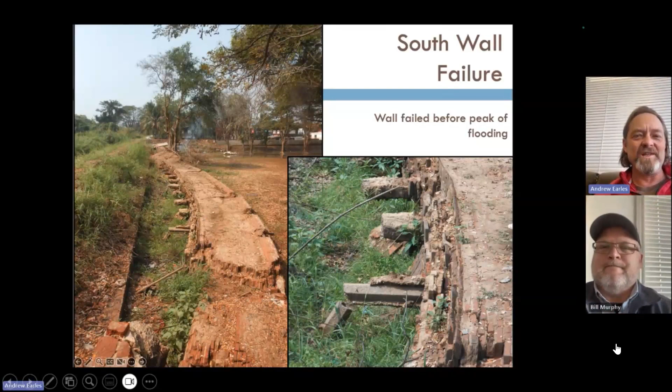So we helped them to redesign an improved flood wall in this location that will stand up to a flood like that in the future. And in order to do that, we had to do some geotechnical investigations, because you're going to build a big foundation. You need to be sure that it's not going to sink into the ground and that it'll be properly supported.

So we actually went out and did a full-scale geotechnical investigation in Thailand in 2013, and we did a number of test holes. Again, in the US, we pull up a drill rig and just punch these things into the ground. It's a much more involved process in Thailand.

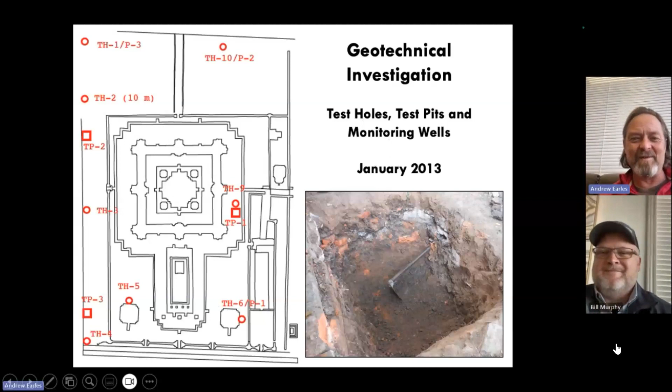We also dug some test pits. On archaeological sites, you have to be very careful and get proper permission to do any sort of digging at all. And when you do, you usually find some really interesting remnants of pottery and things like that from hundreds, if not thousands, of years ago in this case.

So this was kind of the rig that we used for doing our geotechnical testing. You can see they had this little motor where they'd pull up the weight on a rope. They'd have their Shelby tube going into the ground, lower it and smack it on the rope, and it would push in a couple inches at a time. Sometimes two of these guys, you see the two ropes hanging down on either side, would jump up and grab those and pull down on them to push it in a little further. But it takes a long time to bore 3 or 4 meters doing it this way.

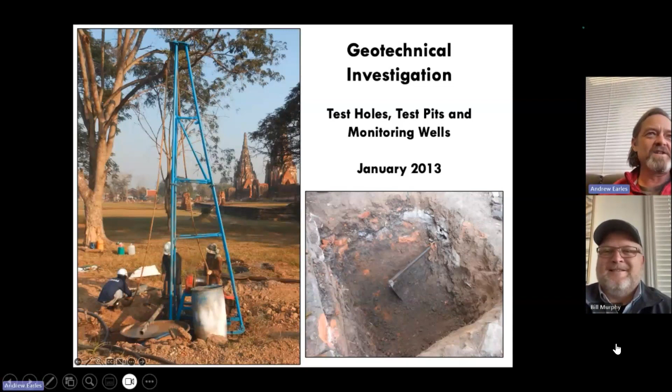But they did, and it was good data, and we were able to design a good foundation for this wall. And we built that flood wall, which has now been built and is protecting the site.

So another site I've worked on in Southeast Asia is called Phnom Bakheng, and that is in the Angkor area of Cambodia, which is honestly one of my very favorite places I've visited in the whole world. The Angkor Archaeological Complex covers hundreds of square miles, and there are just amazing temples all over the place.

A lot of them are really concentrated in the area around this temple called Phnom Bakheng. Angkor Wat, which I think everybody has heard of, the largest continually active Buddhist monastery or Buddhist temple in the world, is a kilometer down the road from this. And then another site called Angkor Thom, which is one you might have seen with a bunch of carved faces in the stones, is a kilometer up the road from this.

So this is one of the earliest structures at Angkor. Actually, it's interesting because most of the structures in Angkor are built pretty low in the floodplain, but this one was actually built on a hill. That's what Phnom means - Phnom means hill. So this is a temple on top of a hill.

And you can see this is kind of the general layout. Here's our Phnom Bakheng, where you can see the hill. This is Angkor Wat, which is very famous, and this is Angkor Thom to the north, which is also very famous.

Now, I love this huge feature you see over here - this was an ancient reservoir called the Western Baray. And this feature you can see over here, although it's not shaded in, was the Eastern Baray. We believe, and it's pretty well accepted, that both of these were major reservoirs that helped to support this civilization while it was active here, 1,000 to 2,000 years ago.

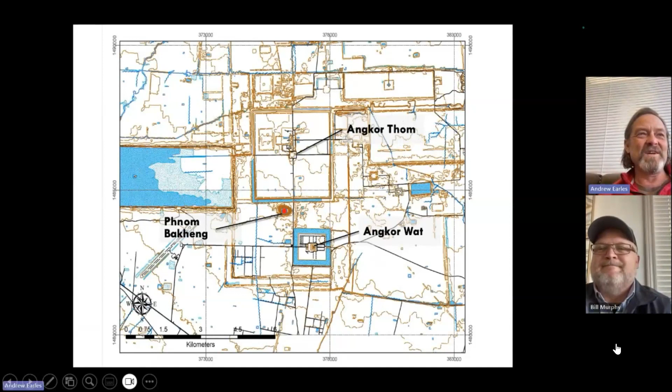Yeah, classic. So anyway, this is Phnom Bakheng, and I got in there - I think it was in the middle of the rainy season. The first afternoon I got there, the way it works is it doesn't just rain all day. It's usually sunny for most of the day, then storms roll in the afternoon and it rains really hard for a few hours, then it goes, and it repeats the next day. Well, the first day I got there, I was just meeting people, and sure enough, in the afternoon it started raining, and everybody headed into the shelter except for me.

I put on my raincoat and ran out, taking pictures and videos and making notes on my map, because I needed to figure out how the drainage works around this temple. It's up on a hill, but it's a pretty flat platform up there, and there are a lot of areas to consider. The best way to figure that out was to actually see where the water goes. So I mapped out these drainage paths and sump areas where water ponds. Within 24 hours of arriving, I had a perfect drainage map because I'd gotten out in the rain and gotten wet to document where things go.

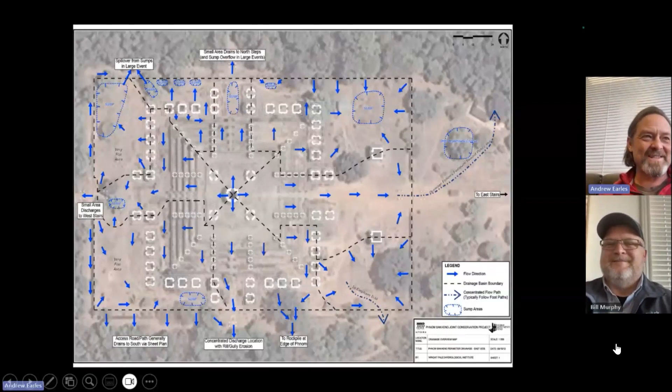I think the people in Cambodia thought I was crazy, but once they understood what I was doing, they totally got it. The issues at this particular temple relate to this picture at the top, where you see this orangish stone. That's called laterite, a clay stone very common in Cambodia. It's used in a lot of buildings because you can cut perfectly square blocks out of it, dry them, and they have good strength—good building blocks, kind of like a Cambodian cinder block. But the problem is when it gets wet, it has really high plasticity and it deforms and degrades.

So the way these temples were built—if you look in the left-hand corner here, you can see a laterite core. What they would do is get sandstone and put it as a cover or wrapper around these temples, fitting it really close together. The laterite would fill it and shape it inside, and they'd use the sandstone for the finishing layer.

Over hundreds of years, or even dozens, this can happen: with people not maintaining it, tree roots get in there and push apart the sandstone a little bit. It shifts, water starts to get in, and the laterite starts to degrade. Then the sandstone starts to fail more. So really, the process is that the laterite is just degrading, and that's what they're trying to restore.

The way they decided to fix this—WMF did, and this wasn't our design, they worked with a specialty designer—was to rebuild half of this temple by putting in new laterite blocks, and then on top of the laterite blocks, they put an impermeable liner, so that even if the sandstone shifts a little bit, they're not letting water get into that laterite.

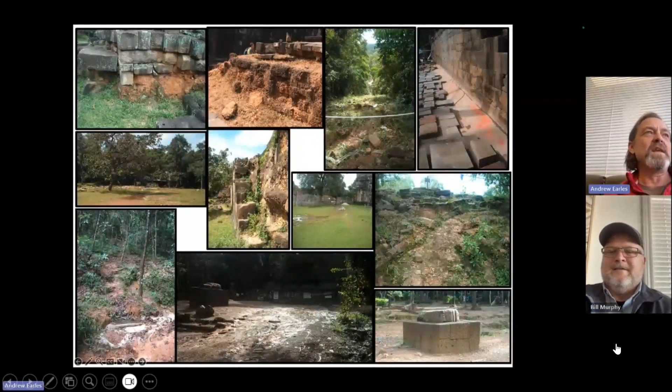Just before I move on—I don't have the design drawings here, but we did end up designing a subsurface drainage channel for them that has these laterite covers on it. The intent is to provide drainage without anybody really knowing it was there for that purpose. I think they're still working on this temple, and the drainage is probably one of the last items that will be completed.

But this is a big project. It was actually funded by the U.S. State Department through a fund called the Ambassadors Fund, which does work all around the world and really gives us in the United States a nice international reputation for trying to help people.

I didn't know that. So, thank you. Yeah, okay, well, that's that one, Bill.

Let's see, the next one I had is this interesting one called the Nanyue Palace from Guangzhou, China.

I don't expect a lot of people have been to Guangzhou, but imagine New York City, but probably even a little bit bigger. It's massive. It's one of these Chinese cities that you probably haven't heard of, that's bigger than any city we have in the United States.

Back in the early 2000s, the Chinese government was doing a project to install a telecommunications line in this area, and they discovered what's shown in this picture: a real significant archaeological site with ancient wells, ancient pipes, and an ancient water garden. This feature going through here is a drainage channel that goes into this pond. They found an old wooden plaque with an inscription from about 2,000 years ago, preserved in the water, with the Chinese symbol for turtle on it. So they know they were raising turtles here, which is kind of interesting.

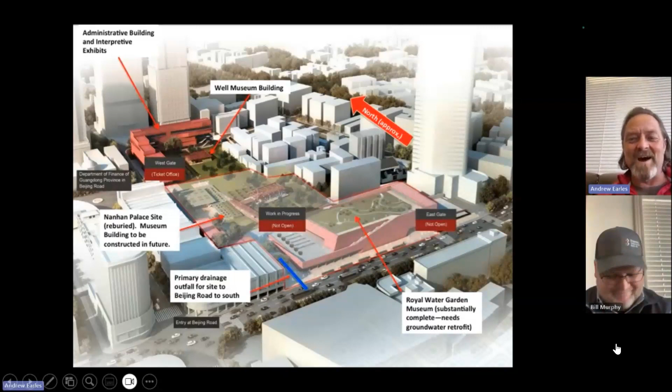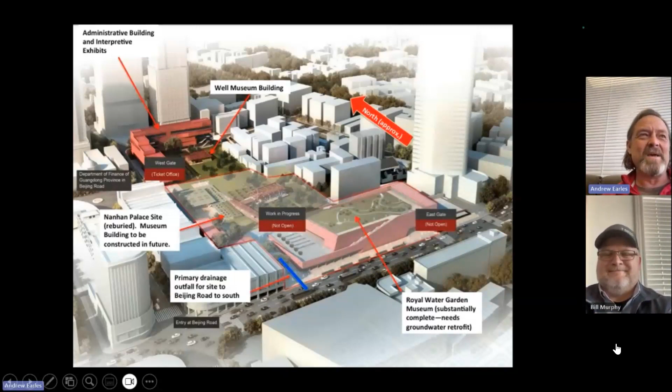The problem is the Chinese had a big event coming up, I think it was the Pan Asian Games or something, and they built this massive museum. It looks a lot like what you see here, but they didn't address the groundwater problems before they did that. So now they're trying to deal with that inside the building, which leads to all sorts of shoring issues, much more complicated than if they'd addressed it before building the museum over the area. But it's a beautiful museum and a really amazing place to see.

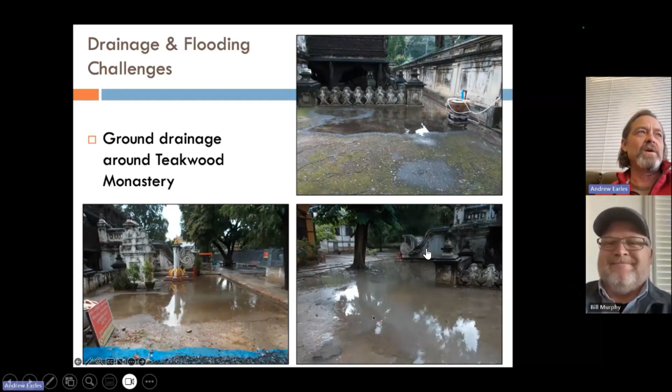The slower death to this thing is by termites. This thing had terrible drainage around the building, and the termites just eat this damn thing apart. So we were trying to manage the drainage. You can see some of the standing water right around these areas. The termites would basically just go right up these marble things, right onto the teak wood, and start eating it apart. So we developed a plan that was kind of a two-phase plan.

The first one was really related to doing some real good grading and flat work around this thing. We were getting down to hundredths of an inch, hundredths of a foot, but just doing everything we could to shed the water away from the building. That has all been constructed, it's been in place for about 3 years, and at least from what I've heard, the last time I heard about a year ago, it was working very well, and they're getting the water away from the structure.

The second thing we were going to do is that they have kind of this, I call it a boneyard right now, on about a third to a half of their site that's just overgrown. What we'd like to do is take the runoff from this site and the runoff from surrounding areas and create a large pond back here. That could provide some temporary water for the dry season for fire suppression.

It would also be a way to just manage the runoff from the site, because there's a canal out here, and when this canal gets high, it will backflow into the site. And it's a filthy canal. So what we want to do is put a backflow gate on there. We want to hold the water from our site, which is a bit cleaner, and then release it back to the canal when the canal goes back down, and store some of that water for use in dry periods in the summer. So about half of this has been done.

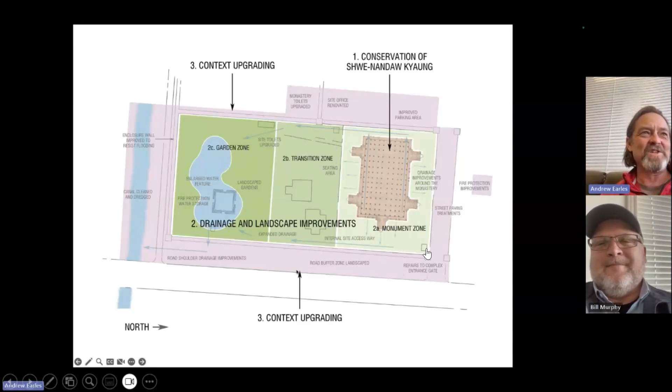The other thing is there's a monastery right next door that basically has an open pit latrine that overflows into this site. So we were also going to design a septic system for them. But the first part got done, and then the conditions really changed quite a bit in Myanmar. I'm still really hopeful we'll be able to get back there and finish this job someday, but that remains to be seen.

I'll bet. Andrew, I bet a lot of our friends would be shocked at how many open pit latrines still exist in the world. Oh my God. There's a lot of places that they're doing the best they can, and they don't know how close they are to disaster. So no, they just don't. And most places in this world don't have solid waste pickup. That's a really big deal. I mean, we just take it for granted that the garbage man comes by and hauls our stuff away every week.

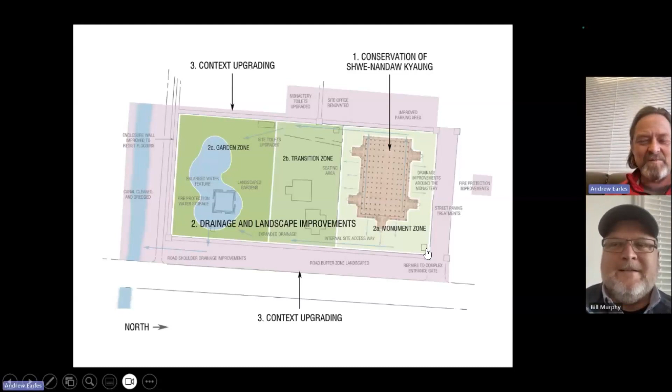And in most parts of the world, it just ends up in the nearest waterway. It's really a shame. Unless you travel to places like that, you just don't realize how good we have it in the United States a lot of times, I think.

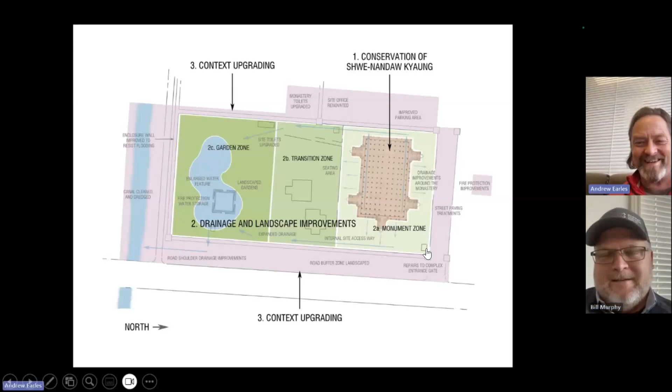The Tower of Babel was real. The story about everybody being scattered with languages might be a little literary liberty there, but it was a real place, and I've been there and seen it. This Ishtar Gate is really neat because it was kind of the iconic entrance there.